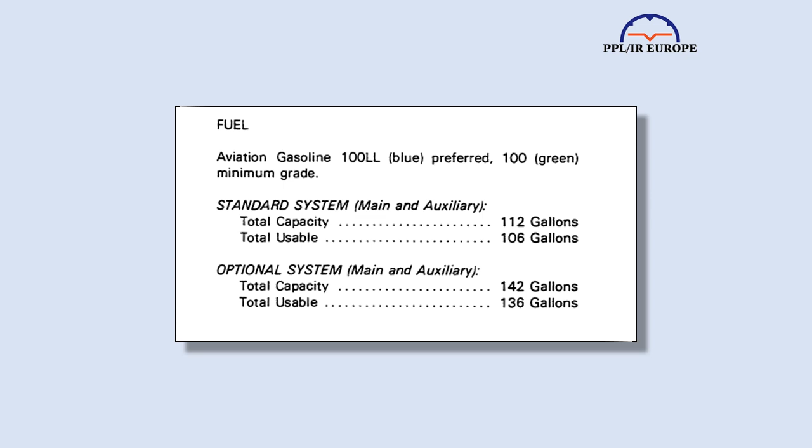So, starting with calibration, the first question is how we know what is the usable fuel capacity of the aircraft. That might seem obvious. Look at the AFM or POH and it will tell you. But tanks get dented, bladders get kinks, there could be sludge or debris inside. It's likely that no one has checked the actual capacity for many years, and it's unlikely to be more than advertised, more likely to be less.

You can defuel and refuel. This is not as difficult as it sounds. You can get a siphon and containers suitable for fuel from eBay, but be very careful as it's a hazardous procedure. If you don't know what you're doing, get trained. When you've got out all you can, in an avgas engine, run the engine till it stops, as that's the only way of knowing what's usable.

If you have an aircraft with multiple tanks per wing, you can run tanks dry over a couple of flights and then refuel, taking careful note of what goes into that tank. Thus, if your fuel system permits, you would run the outers dry on one flight, refuel them, then run the inners dry on the next. If you have one tank per wing, this is a slightly trickier thing to do, as you'll then be landing with a fuel imbalance.

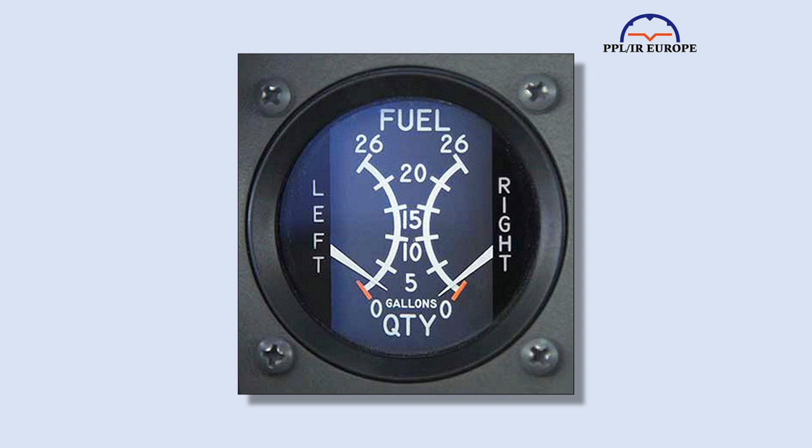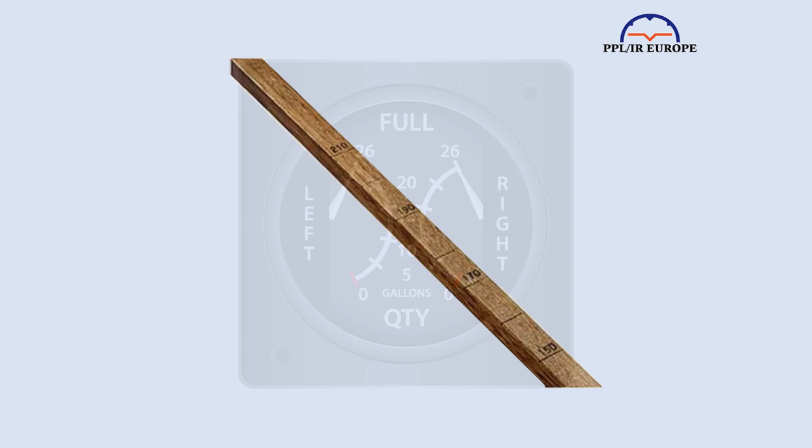If you are going to defuel and refuel, take photos of the fuel gauges at a minimum, empty, quarter, half, three-quarters, and full tanks. It's a good idea to mark the result, as it will almost certainly be different to the markings on the instrument. You might also consider calibrating a dipstick. Obviously, if you rent the aircraft, you're unlikely to be able to do this in advance, and then the AFM is the only way. The next thing you need to know is the actual consumption you're likely to encounter.

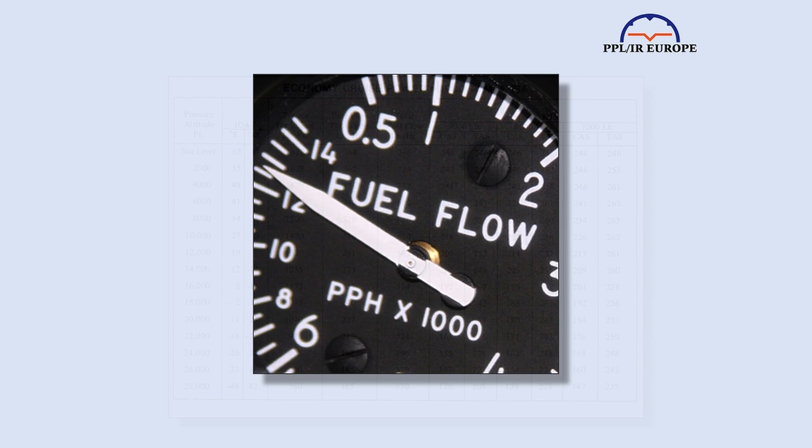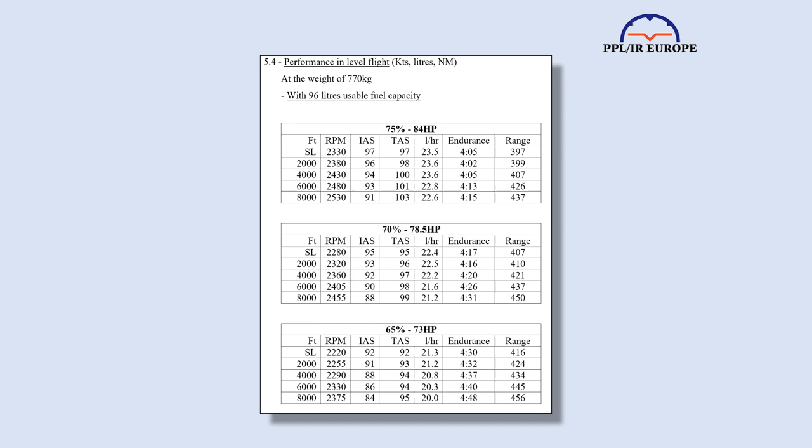Without instrumentation, this is difficult to tie down. Even though the AFM gives book figures for different altitudes and power settings, a fractional difference in mixture or even atmospheric pressure can make a substantial difference. And as aircraft and their engine age, they will diverge from book figures. Also, the adjustment of carburetors, injectors, and controllers is unlikely to be as it left the factory.

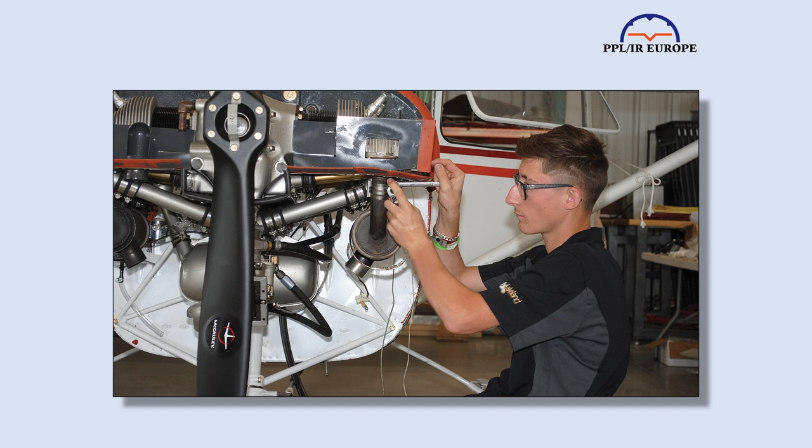The best way is by experience of the particular aircraft. Once you've flown it under a variety of regimes over a number of hours and have carefully noted the refueling figures compared to expected, you'll have a pretty good idea. But if you rent or if you fly intermittently, that's a problem. And also remember that your own aircraft will change over time, so figures you calculated a few years ago may no longer be true. Equally, if the aircraft has had maintenance work on the engine, it can come out differently to how it went in.

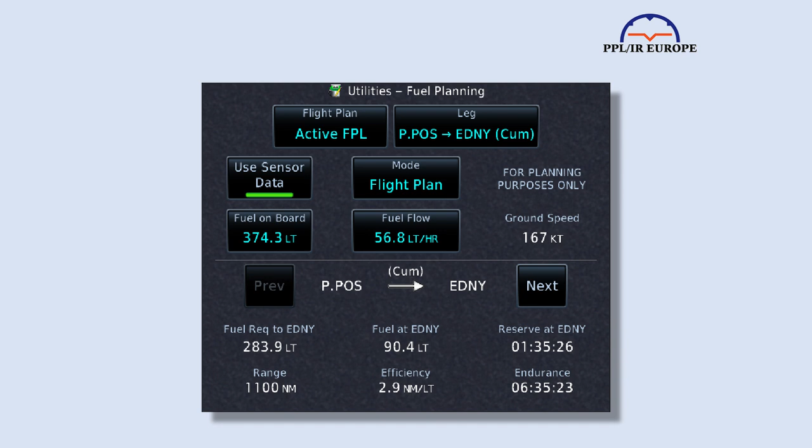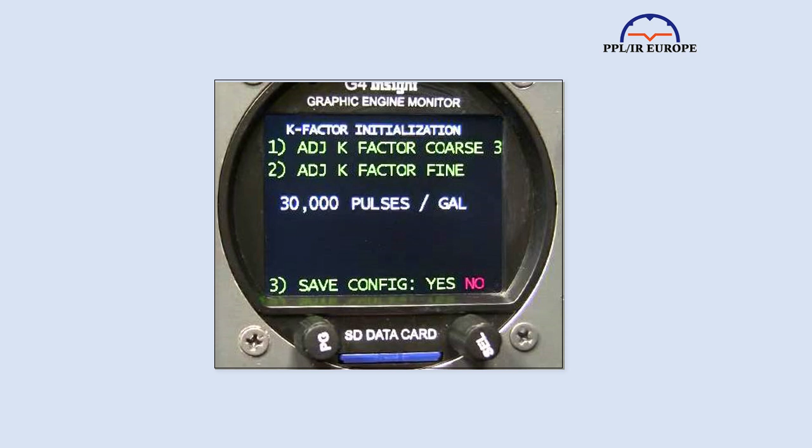The best thing is to have a working, accurate totalizer. These not only tell you your consumption, but also plug into your navigator to give you predicted fuel at destination. More of that later, but for the moment it's important to ensure that the totalizer is calibrated. This entails adjusting the K factor in software. The manual will take you through this. I've owned a number of aircraft with JPI totalizers, and I've managed to get them accurate to within 1%, so I know my fuel flow precisely.

People often say not to trust the fuel gauges in light aircraft, and I must say I tend to agree. But they do provide a gross approximation and can be crudely adjusted, so that's worth doing. If nothing else, they provide a visual warning that you should be giving fuel a thought. I recently collected a light aircraft I hadn't flown before, having calculated the fuel from the POH, and was surprised by how fast the gauges move. So I landed and discovered that it was using about 30% more than I was expecting. So don't completely dismiss the gauges as junk.

Finally, it's worth understanding the benefits and pitfalls of lean of peak operation. I'll discuss it in a moment, but it's not something I can deal with in detail here. The course notes from a weekend-long seminar PPL/IR Europe organized a few years ago are hundreds of pages long. It's a big subject. Maybe I'll make a video about that alone one day.

But it can reduce fuel consumption quite markedly, maybe a 20% reduction for a 5% loss of speed. It's what enabled Lockheed Constellations to cross the Atlantic and strategic bombers to reach their targets. It's only suitable for injected engines, and it's at its best on turbocharged aircraft, but it's worth investigating for your operation. So, enough about general planning.

Let's move on to planning a particular flight or series of flights. I say series of flights because it's becoming increasingly difficult to ensure that avgas is available at all destinations, and prices between them can vary so much. Islay in Scotland costs 6 times as much as Jersey and the Channel Islands, so your fuel planning task may well cover multiple flights. Although I'm not entirely convinced by them, let's start with the rules.

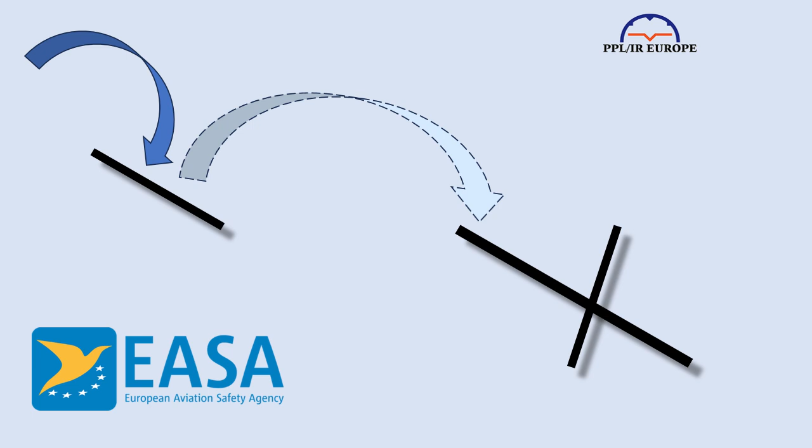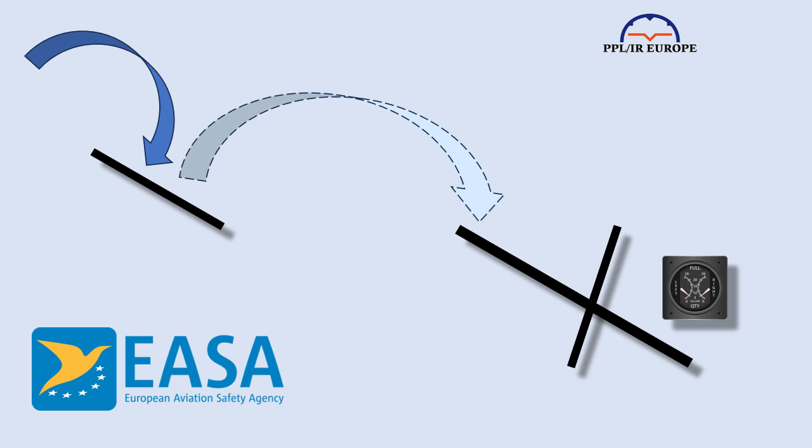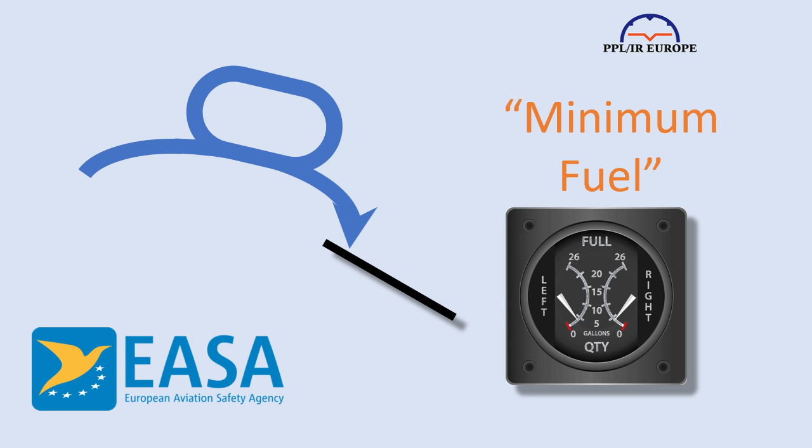That's your judgment call. The pilot in command must have enough fuel to fly to destination, then to the alternate, and land with final reserve intact. If no alternate is required, you only need enough to land at your destination with final reserve. But, to be honest, that strikes me as more than a little silly thing to do. But the bottom line is that you must take responsibility for landing with final reserve fuel. If you're in a position where any delays, holding, or leg extensions may result in landing with less than final reserve fuel, you must declare minimum fuel. If it looks like you're going to land with less than final reserve, you must declare Mayday, Mayday, Mayday fuel.

So the EASA requirement is for trip fuel plus contingency plus alternate fuel, if an alternate is required, plus final reserve fuel, FRF. The pilot can decide what the FRF is, but the AMC recommends for IFR 45 minutes at holding speed at 1500 feet, for VFR 30 minutes at holding speed at 1500 feet. It won't affect those watching this video, but for completeness, if you're on a local flight within sight of the aerodrome, the recommendation is 10 minutes at max continuous power. In summary, the FRF is at your discretion, but must then be protected as a reserve, not used in flight. Your in-flight planning and decision-making must enable you to land somewhere with FRF. If you cannot, you must call Mayday fuel. Minimum fuel means that if there's any further delay, I will declare Mayday fuel.

The situation in the UK is in flux. The UK still uses the old EASA rules, but is considering changing them to be closer to the new rules I just explained. But I better explain the current situation so you know what the rules are for the time being. In reality, they're not very different. For VFR, remaining in sight of the landing airfield, you must carry 10 minutes spare fuel. If flying en route by day, you need an extra 30 minutes, and by night an extra 45 minutes. For IFR, if no destination alternate is required, you need an extra 45 minutes at normal cruising altitude, and if a destination alternate is required, enough to fly the planned route, then to an alternate aerodrome, and then enough to fly for 45 minutes at normal cruising altitude.

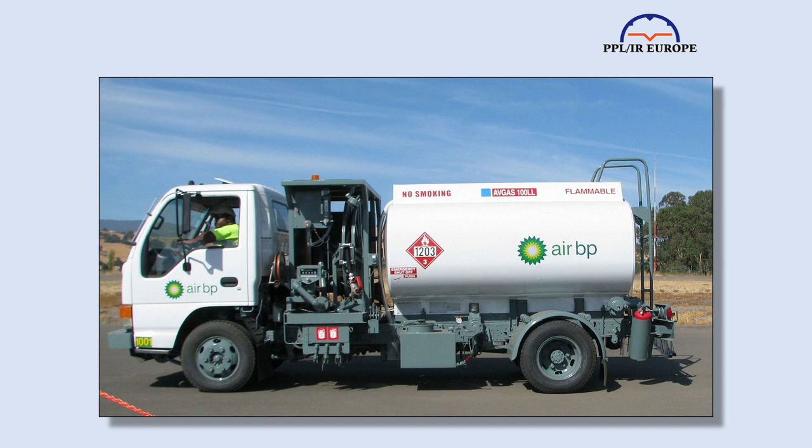Avgas availability is also becoming an issue, and there are some areas where it's increasingly difficult to find. Norway and Greece spring to mind, but it's becoming a problem in many places in Europe. That means that it's not enough just to run low on fuel and then start looking. You should have suitable tech stops in mind, having checked Avgas availability in advance.

Remember that the AIP is not enough. You must check NOTAMs as well, and even be sure that you have the means to pay. There are some places where only carnet is acceptable. Customs and immigration will also be a consideration if you've crossed the Schengen border.

Together with the vagaries of ATC routing, probably the biggest unknown in fuel usage is wind. Generally, aircraft are more fuel efficient at higher altitudes, but equally, wind increases with altitude. And while that's good with a tailwind, remember that headwinds are more common than tailwinds. 55% of all wind directions slow you down and only 45% help you. If you don't believe me, dig up your old whiz wheel and play.

So it's one thing to know what your ground speed and efficiency are, both of which your navigator will tell you if you have a fuel totalizer, but how do you know whether you are best to climb or descend? You can use the forecast, of course, but my experience is that they're not as reliable as in-flight information. The air data computer, if you have one, will give you an accurate reading for your current altitude, but you have to change altitude to discover how it changes.

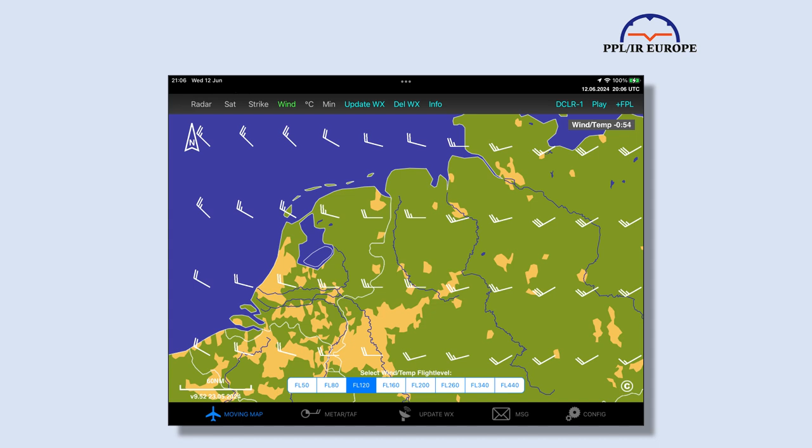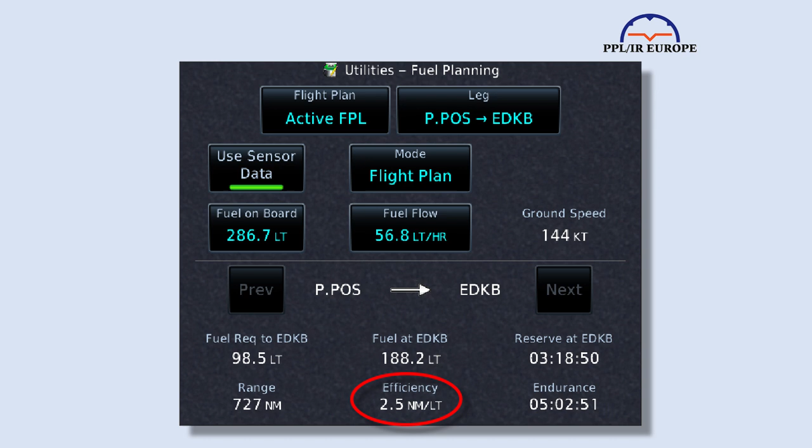Probably the best sources for up-to-date wind forecasts in flight are Golze and Connext, with Golze having every advantage of capital and running costs and ease of installation. From the data, you can calculate your prospective ground speed and efficiency at any altitude. Your efficiency will vary with power regime. Generally speaking, lower power settings will give you greater range even in the face of headwinds.

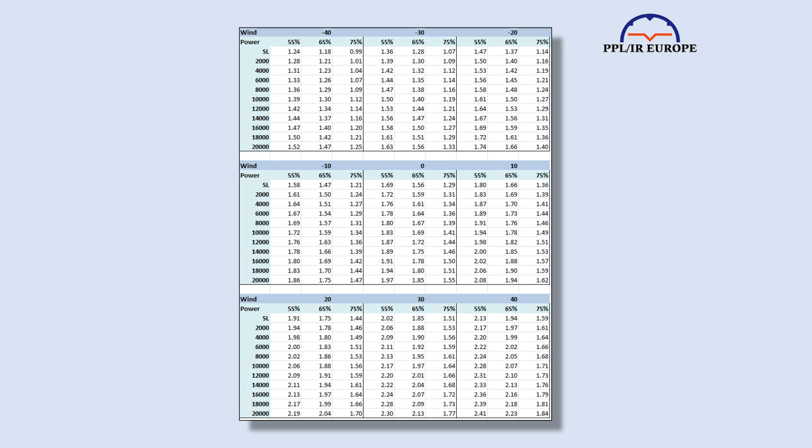I've spent happy hours deriving theoretical efficiency and range tables for my aircraft at different altitudes in different wind conditions. And even against a 40-knot headwind, range is greater at 55% than at 65 or 75%. However, in my aircraft, 55% is lean of peak and the others are rich of peak, so your results may vary. It's not difficult to derive these figures from the POH. It's such an obvious calculation, I'm surprised that most POHs don't include it.

So, we've talked about planning in general and planning for a particular flight. Let's end by talking about fuel management once we're airborne. How do we know how much fuel we've used and how much we have left? If we have a calibrated totalizer, there's no issue, provided you remember always to register fueling accurately. But that is no mean feat on many of them, as they have the worst human interfaces known to man, enough to get the average saint cursing the heavens.

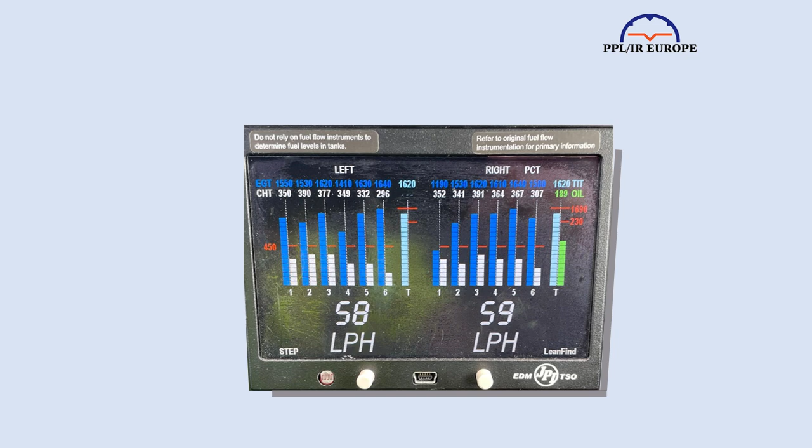But if you don't have a totalizer, you need to do calculations, which will invariably be less accurate and perforce conservative. The most basic estimation is to know how much the aircraft uses per hour, and some schools and clubs tell you to work on X litres per hour and leave it at that. But that leaves so many questions unanswered.

Generally, the schools will assume that you will not be leaning, but even rich of peak leaning can easily reduce consumption by 30% or more. But it also doesn't take into account taxiing, takeoff, and climb. The school's estimate will presumably cover anything up to circuit, maximizing consumption. How can an hour at cruising altitude come close to an hour in the circuit?

So, if you're going en route, I would forget about the simple fuel per hour calculation and dig into the POH, which should give you fuel figures for climbing to altitude and for fuel flow in different power configurations. But those figures will assume perfect leaning, a new engine, and a clean airframe, which, unless you're very wealthy, you're unlikely to get. You also need to recalculate for every change of altitude or power.

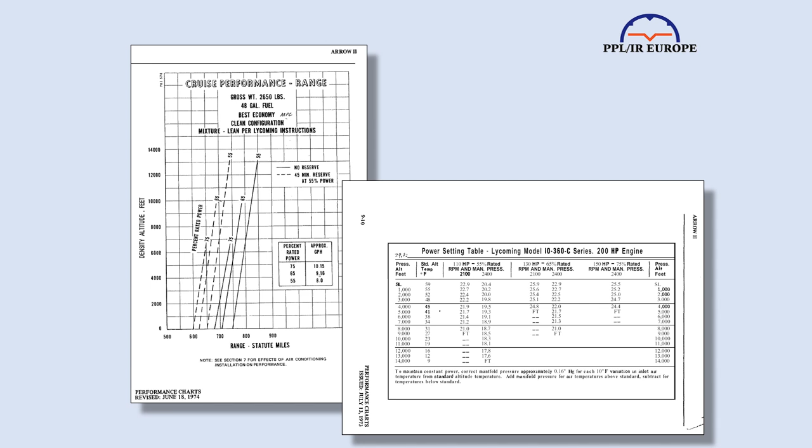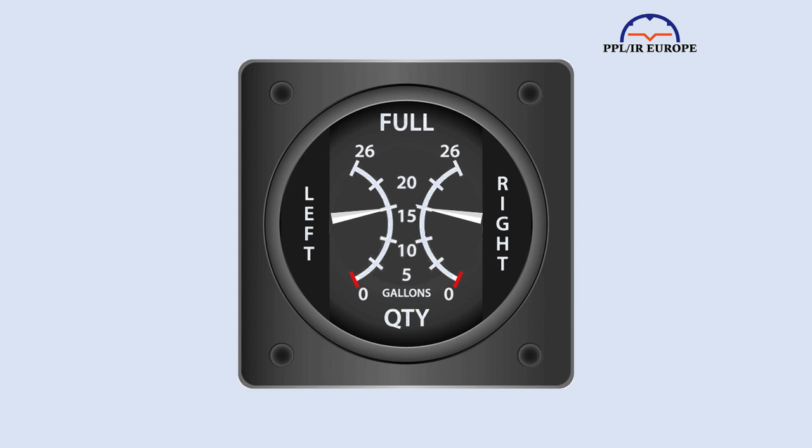Most of the flight planning apps offer fuel plans, and this can make the process easier, but remember that it's garbage in, garbage out. So make sure that the figures are correct for your planned altitude, rates of climb and descent, and so on. You can use the gauges, of course, with all their shortcomings, as I said before, but if you've had the opportunity to calibrate them, they do give a reasonable idea.

Whichever of the four methods you use, totalizer, hourly fixed rate, POH or gauges, the secret is always to check carefully what you put in compared to what you expected. You can then refine your calculations in the light of experience. Let's talk a bit more about leaning. Again, there are a number of techniques depending on the equipment you carry.

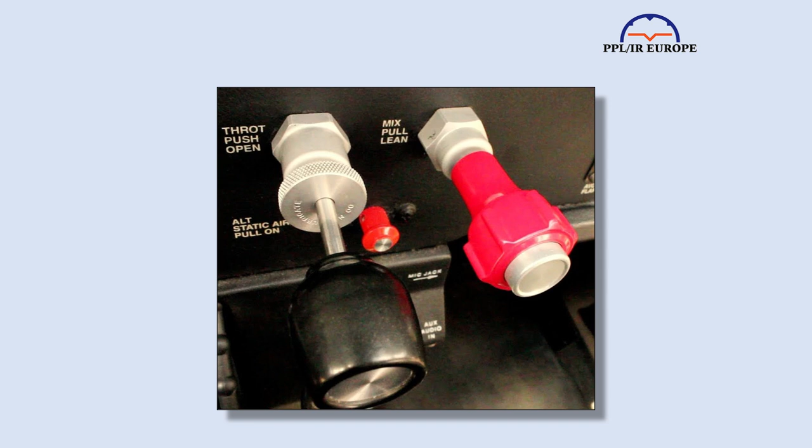Don't take any notice of the old wives' tale about not leaning below, for example, 3,000 feet. That is for absolute beginners based on a fear that their engines will stop and they won't have the gumption to push the control back in to restart it. You should lean in the cruise in any aircraft, with a mixture control, at any altitude.

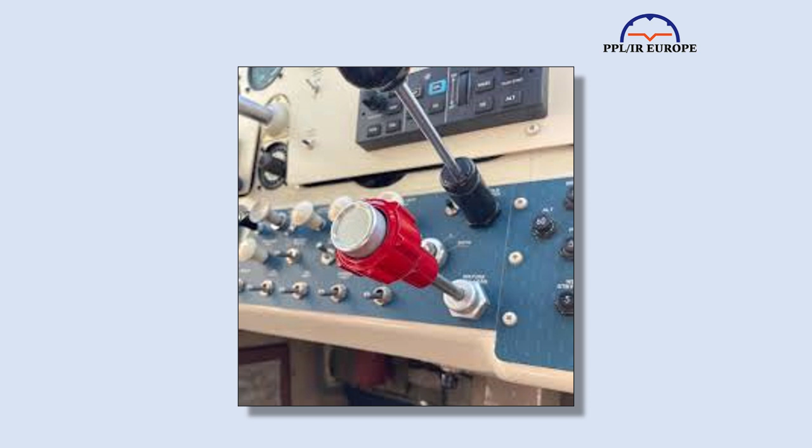If there's no EGT gauge, there's little you can do other than the classic pull back the mixture until the engine runs rough, then push it in a little. This is easiest to do if you have a vernier mixture control, as you can get used to how many turns you need to make. On my little darling Rallye, it is so rough and ready that the engine suddenly stops and you just have to push it in a bit to restart it.

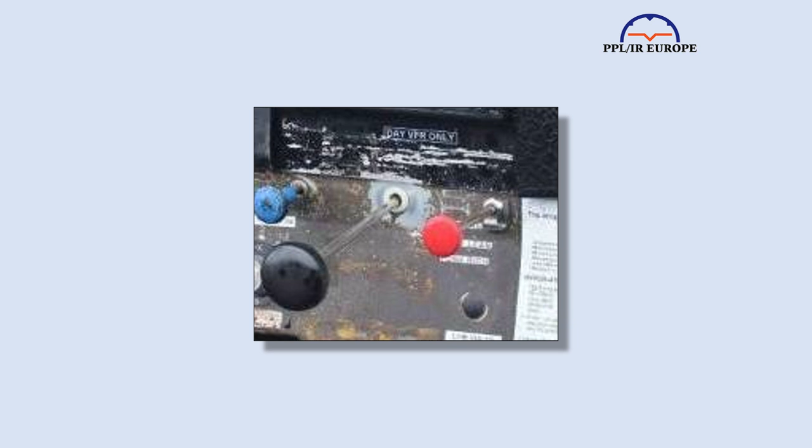Every aircraft's different. What you're actually doing using this technique is finding peak EGT on the first cylinder to go lean of peak, then bringing it back rich of peak. If you have just one EGT per engine, you can be a little more sophisticated, but remember that all the cylinders will be different and you're only looking at one of them. But you can lean until you see the temperature reach its peak, then enrichen it until it's 75 degrees Fahrenheit cooler than peak.

On most EGT gauges, there's a cursor. If you normally fly at the same power setting at the same altitude, you can just set the cursor to 75 degrees Fahrenheit rich of peak, and then on future flights, just put the EGT on the cursor. Do be careful if other people fly the same aircraft, as they may move the cursor to match a different power regime or altitude. If you have an engine monitor with EGTs for each cylinder, it becomes much easier to lean precisely and to fly lean of peak, which consumes much less fuel and is better for the engine.

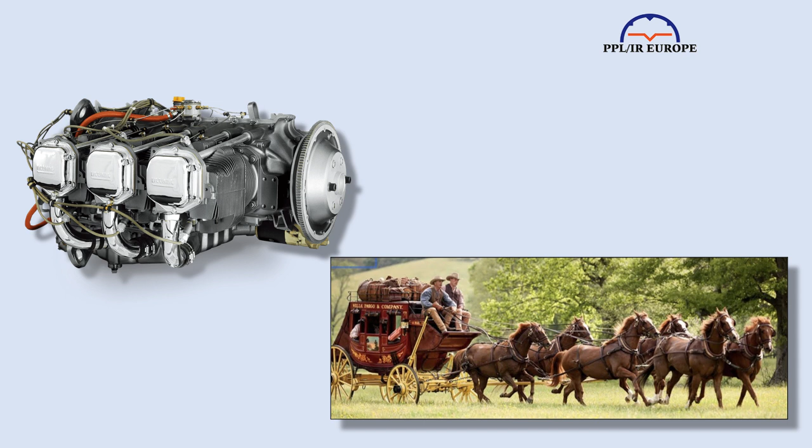The thing is that the block bolted on the front or wings of your aircraft is not really an engine. It's 4 or 6 different engines tied together. Like the horses pulling a stagecoach, you can command, steer, even whip the whole team, but it's difficult without information from each member of the team to know exactly how it's performing. To some extent, an engine monitor provides that information and allows you more accurately to control what's going on.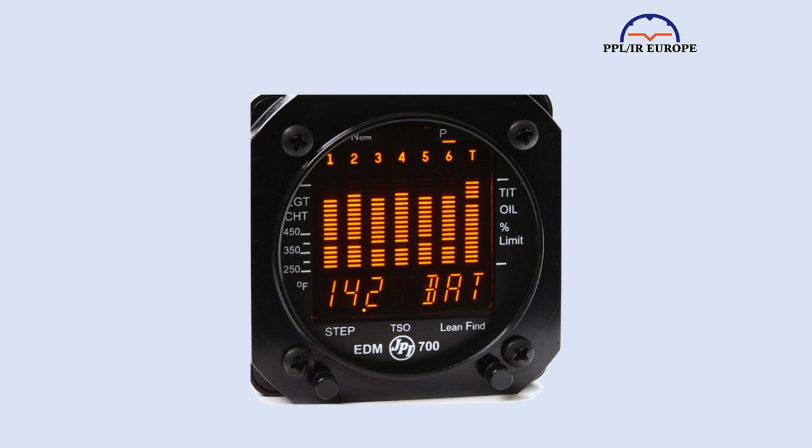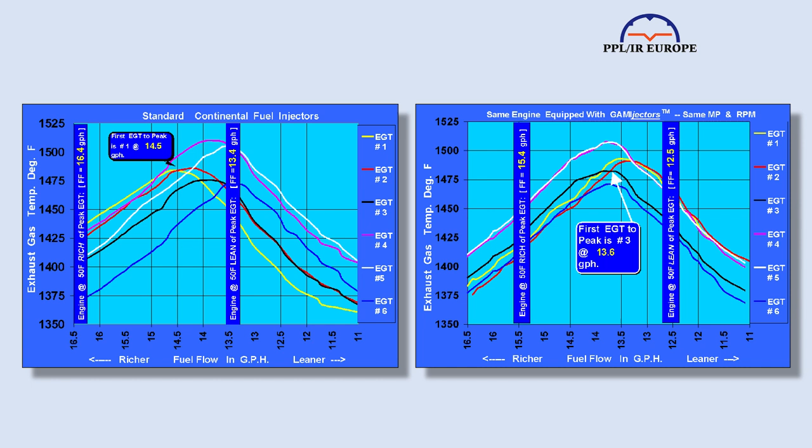If an owner is interested in the benefits of lean of peak operation, they'll start by using the analytical data from the monitor to balance the injectors to ensure that all the cylinders peak at the same mixture control setting. You send the engine data off to GAMI in the US, and they send back balanced injectors. That allows you to take all the cylinders into lean of peak operation at the same moment, avoiding the lumpiness you get when you weaken the mixture on an unbalanced engine. Having said that, the injectors on my Navajo are original and are balanced as well as GAMI could manage.

Generally, lean of peak operation means operating at 50 degrees Fahrenheit cooler than peak, though this may be a bit more or less on different cylinders. I find that on a turbocharged engine, the easiest way to do this is to look at the turbine inlet temperature, as it is the aggregation of all of the EGTs. If you take that to peak and then 50 degrees Fahrenheit cooler, you will have done the best average job.

It's important to note that measurement of absolute EGT is not reliable because the placement of probes is so critical, but there is a maximum permissible turbine inlet temperature, typically 1650 degrees Fahrenheit, and if that is exceeded, turbo damage is likely. Lean of peak works best with turbochargers.

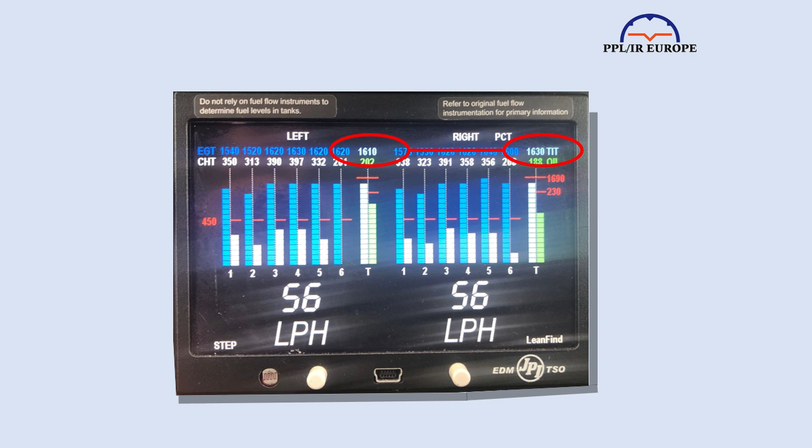People tell me that it works on normally aspirated engines, but my experience in the Aztec was that power fell away dramatically lean of peak and operation was inefficient. Your results may vary. On my turbocharged Navajo, I get superb results, with fuel burn for the same speed reduced by a third. Lean of peak has every advantage over rich of peak, giving lower cylinder head temperatures and cylinder internal pressure, as well as greatly improved fuel burn and range.

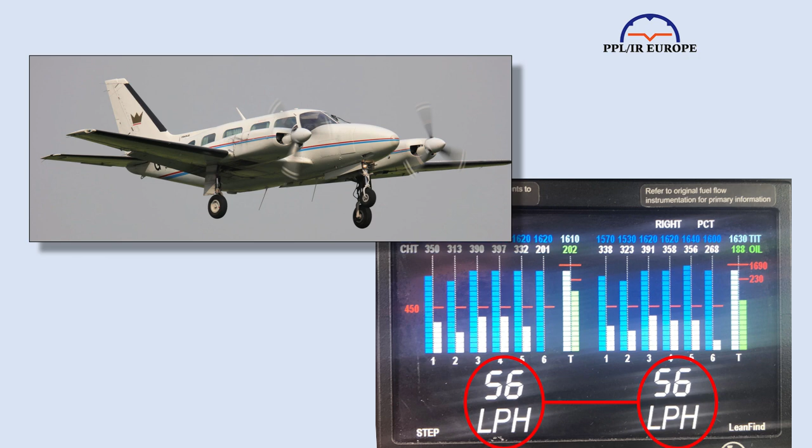Let's now talk about the biggest killer, especially in MEPs, fuel starvation and fuel exhaustion. The silliest way to die in a light aircraft is to go down with engines which have run out of fuel, but with plenty of fuel on board, which is in unused tanks. It seems to me that some Cessna twins in particular are prone to this, and I recommend the accident report on G-BXUY to anyone with a complex fuel system.

Two people died as a result of a Cessna 310 engine stopping from fuel starvation when there was more than half an hour's fuel remaining in the auxiliary tanks. So it's really important to know the fuel system. This may be obvious in an aircraft you own and fly a lot, but a rental where the checkout has been in the circuit and local area is a different matter.

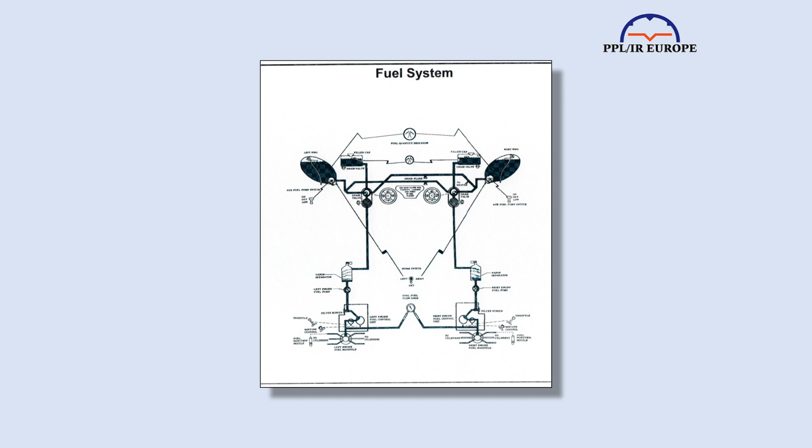Some aircraft return excess fuel to a different tank from where it started, and if there's not enough capacity in that tank, it will be vented overboard. In others, you need to transfer fuel from one tank to another before it can be used, and that fuel flow may be slower than the burn rate, meaning that the transfer tanks cannot keep up with consumption, making fuel inaccessible. Thus, you can get fuel starvation with fuel on board if you're not on top of your game.

When the fuel actually runs out, it's called fuel exhaustion and is the biggest single point of failure, especially in twins. The classic case is the pilot trying to maximize the amount of cheap fuel they can buy in the Channel Islands and ending up in the water a few miles short. I'm all for cheap flying, but ditching out to sea is not cheap. Pushing it to the limits is a gamble.

Funnily enough, I'm writing this script in Guernsey, well able to have planned to arrive on fumes, but I refueled before I left Biggin Hill and actually had 2.5 hours of fuel remaining on landing, costing me €300 in lost opportunity. I don't feel lucky. Please don't push it. PPL/IR Europe has lost too many friends already. Don't be the next one. Set your final reserve fuel higher than EASA suggests, and then higher again.

Finally, replanning in flight. Flights rarely go as planned. As a summer job, I used to work in a petrol station in the days when forecourts were manned, and the great explorer Ranulph Fiennes would regularly arrive in his E-type and demand exactly the number of tenths of a gallon, and that would be where the pump would cut out every time. Such planning is possible, but wind and ATC routing and delays are not always as we plan, and we might do better or worse beyond our control.

If we're doing worse and we're going to be close to our final reserve, we must have a good idea where we can divert, which may or may not be as planned alternate. But if there's any possibility that the situation might arise, we need to know where is open with the correct fuel, has customs and immigration facilities if required, which is not affected by NOTAMs affecting fuel, opening hours, runway, parking, or nav availability, which has weather reliably above minima, and which is not going to be prohibitively expensive.

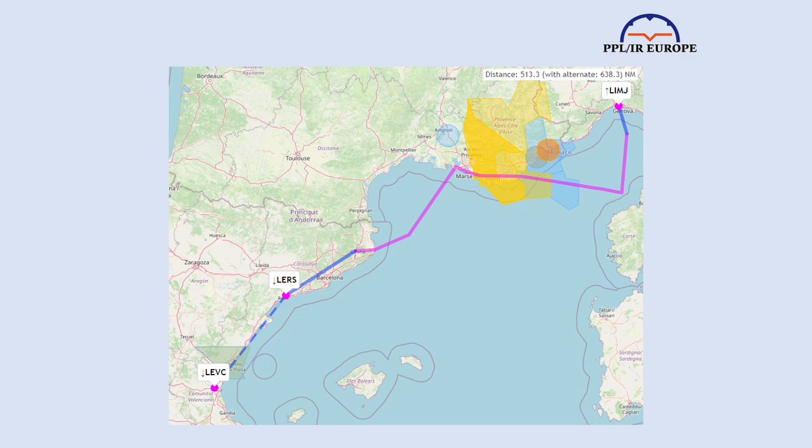This has all been fairly obvious stuff, but it's good to bring it back to the forefront of your mind. Fly safely with plenty of reserve.